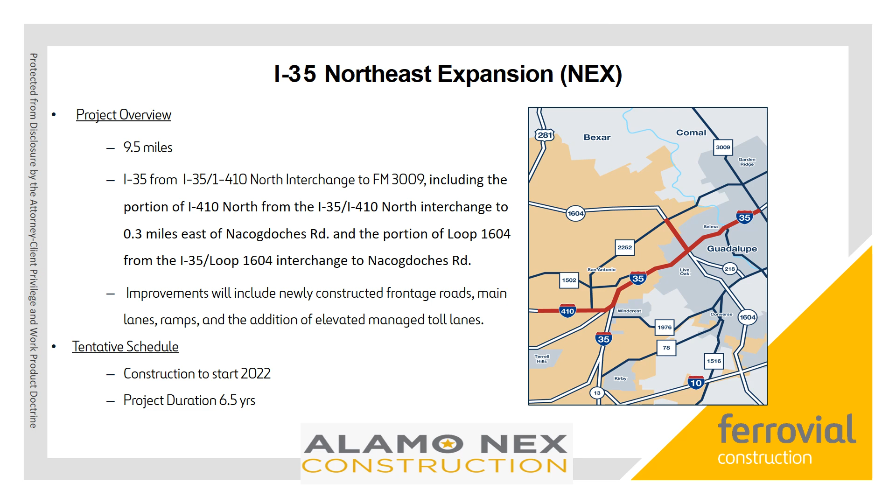Today we will answer the following questions: Who is responsible for your personal safety? Who is responsible for notifying your supervisor when you do not have the tools or equipment needed to perform your job safely? Who is responsible for reporting unsafe acts or conditions to your supervisor?

You have to ask yourself, who is responsible for your personal safety? You are.

Emergency lockdown procedure is as follows: Stop, sit, no activity, and make your badge visible.

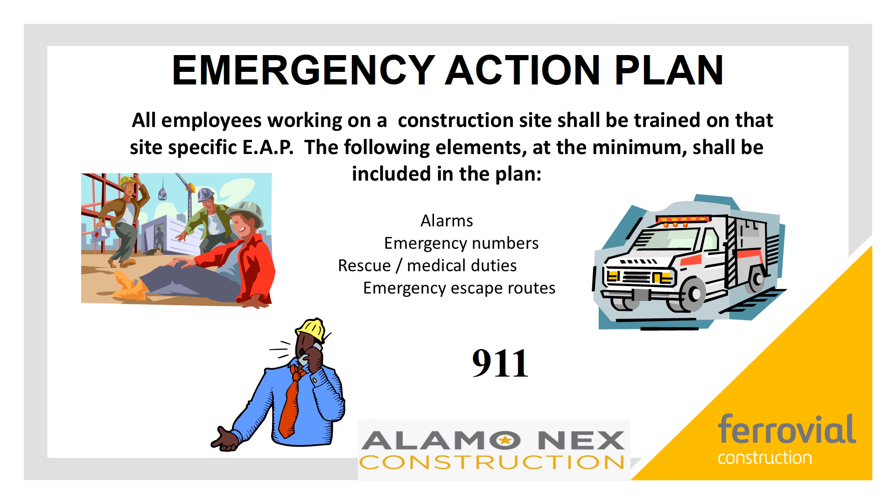Accident, injuries, and property damage reporting. All accidents, injuries, and property damages must be reported immediately to your supervisor as well as to the safety department. Follow your company's policy for the situation.

ID badge. All employees and contractors will be issued an ID badge and must have it with each person at all times while on site. Employees without a badge will be removed from the project. Please take note of the contact information on the back of the badge.

All employees are required to wear the appropriate PPE, from vests to hard hats, proper footwear, and safety glasses.

Traffic is the greatest hazard that we are all exposed to every day. Do not assume that motorists are looking out for you. Only work and park vehicles inside the lane closure. Do not alter the lane closure for any reason. Put your vehicles between you and oncoming traffic. Report damaged or missing devices to your supervisor.

Alamo NEX Construction has a zero-tolerance policy regarding fall protection. There will be 100% fall protection beginning at 6 feet above the working surface and maintained 6 feet back from any leading edge.

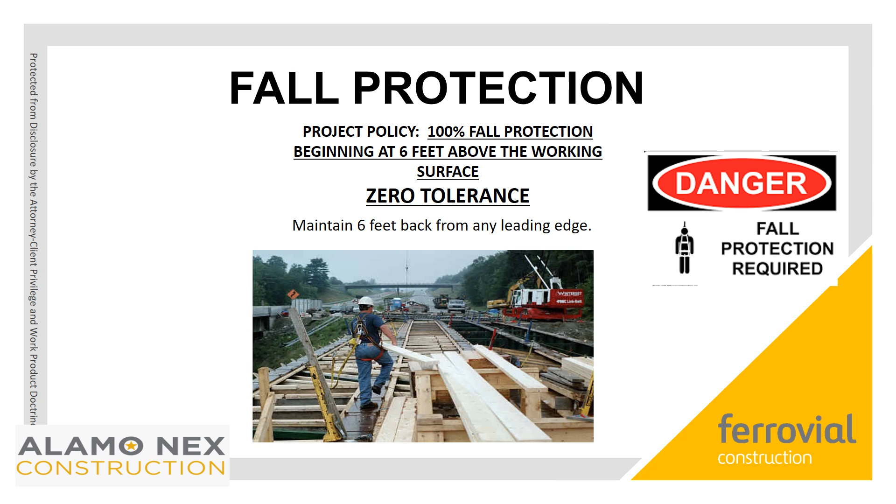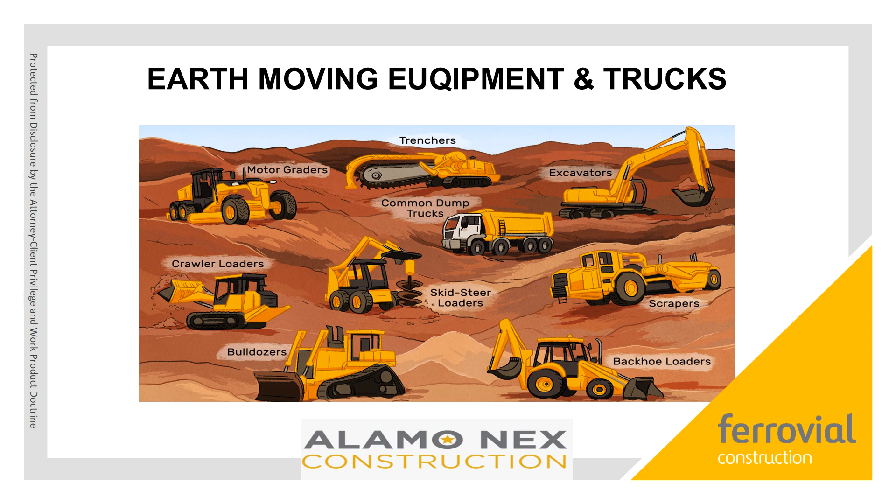Overhead power lines. Always be looking out for overhead power lines. If power lines are not visible, stop and confirm before you proceed on raising your truck bed. Contact Alamo NEX Construction Safety Department immediately if you have made contact with the overhead power line. Do not touch the damaged utility for any reason.

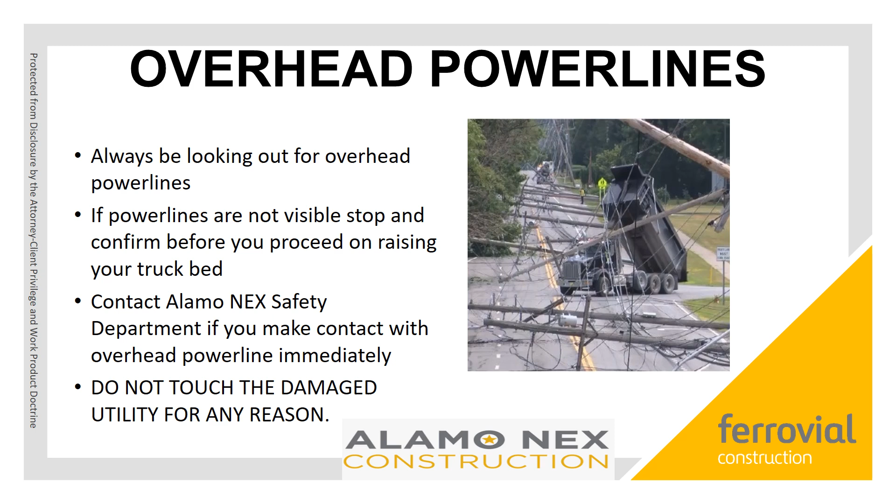Truck drivers are expected to maintain and inspect the truck and trailers daily. Avoid distractions, stay alert and focused on the job site. Dress appropriately for a job site. You'll have to have the correct PPE on if you step outside of the truck for any amount of time.

All truck drivers are expected to remain in their truck. Maintain and inspect the truck and trailers daily: tire pressure, pins, bushings, hoist cylinders, etc. Avoid driver distractions such as phones, radios, etc. Stay alert and focused while on the job site.

Dress appropriately for a job site. Shirts with sleeves, pants, work boots, high visibility vests, hard hat, and safety glasses are required if you're going to step out of the truck at any amount of time. Maintain 3 points of contact when entering or exiting the truck. Always know where workers are located in the loading, hauling, and dumping areas.

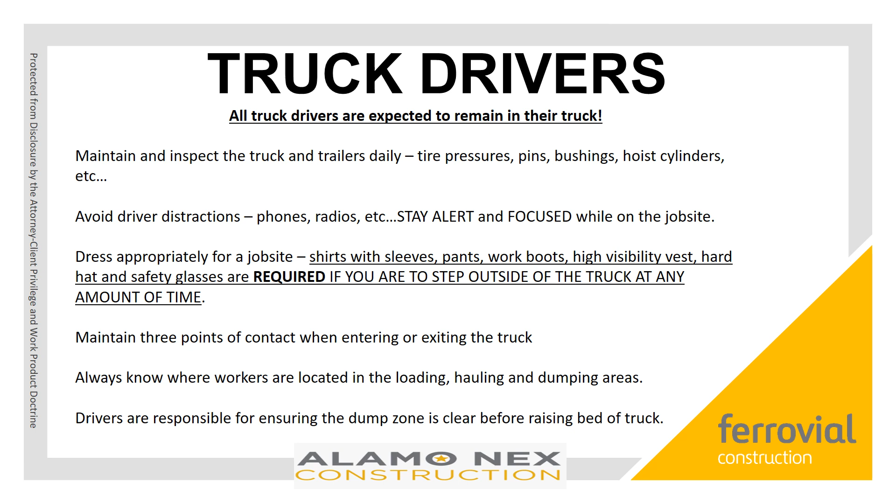Drivers are responsible for ensuring the dump zone is clear before raising the bed of the truck. Be aware of obstacles, other equipment, other workers, uneven sloping surfaces, poorly compacted fill, and wind conditions. You may help prevent potential issues by ensuring the area is reasonably level and compacted before spreading material, and by deflating the airbags before raising the dump box.

Always make sure your backup alarm is in good operating condition. Set the trailer brakes and release the truck brakes during end dumping to avoid unexpected load shifting and tip over. Never raise a load too close to people, the roadway, other equipment, or trucks.

When entering a job site, remember that there are others entering behind you. Obey all posted signs, and only enter and exit through the proper entrances and exits for that work area. If unsure of entrances and exits, contact your supervisor for this information.

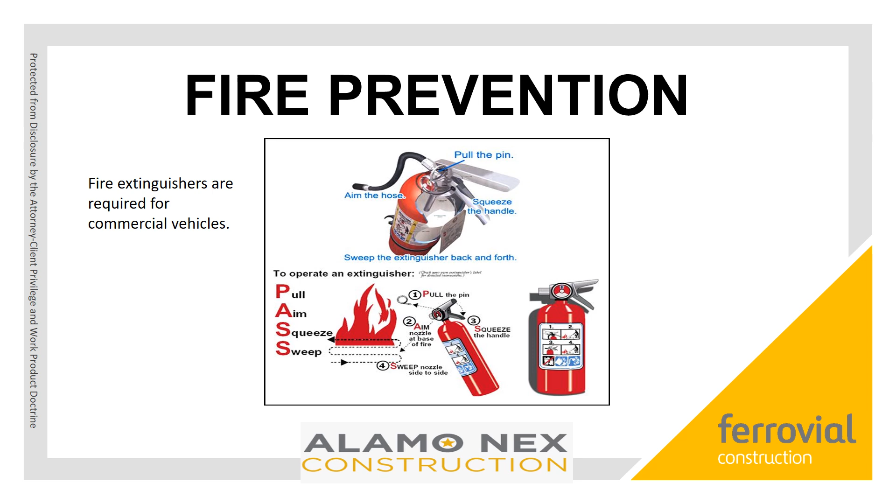When using a fire extinguisher, use the PASS method: pull, aim, squeeze, and sweep. Pull the pin, aim the hose, squeeze the handle, and sweep the extinguisher back and forth.

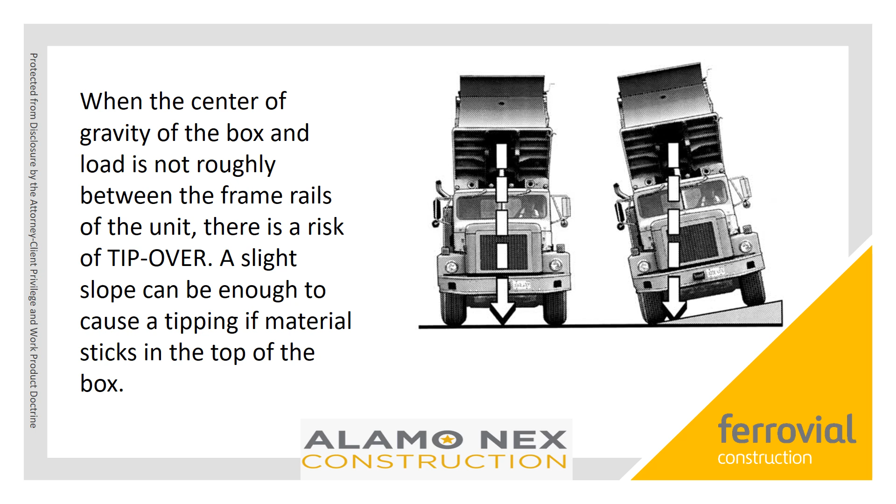When the center of gravity of the box load is not roughly between the frame rails of the unit, there's a risk of a tip over. A slight slope can be enough to cause tipping if material sticks in the top of the box. Please see the following examples of problems caused by unleveled ground.

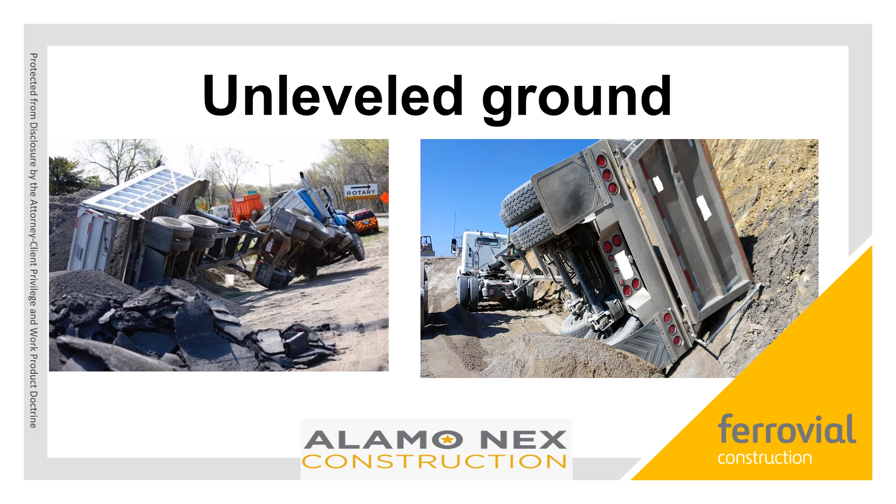This is one of the many reasons you need to be aware of your surroundings at all times. It is important that you only dump materials on level ground to help avoid issues like this one shown in the picture.

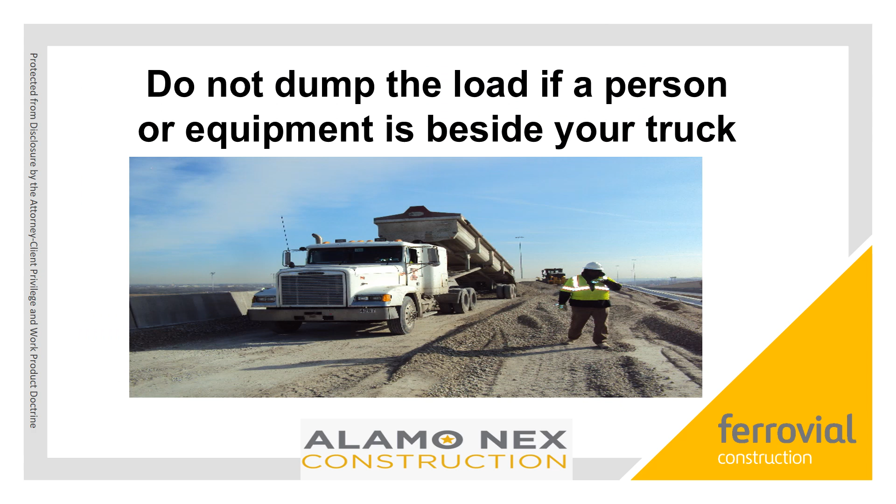Do not dump the load if a person or equipment is beside your truck. Make sure to check both sides as well as behind you prior to raising your bed. Don't let this happen to you.

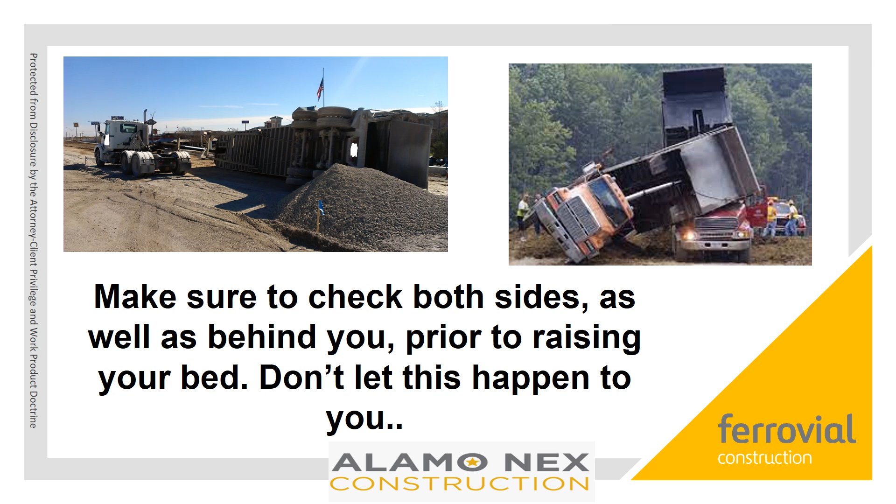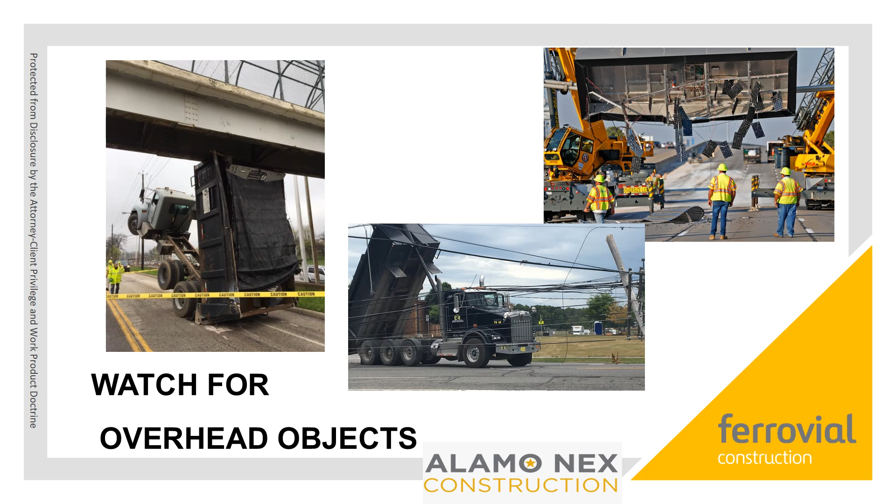It is important that you watch for overhead objects and ensure that your bed is down prior to leaving the job site. Be aware of debris and objects or openings on the ground.

Environmental controls are very important on this job. Please do not drive over stormwater controls.

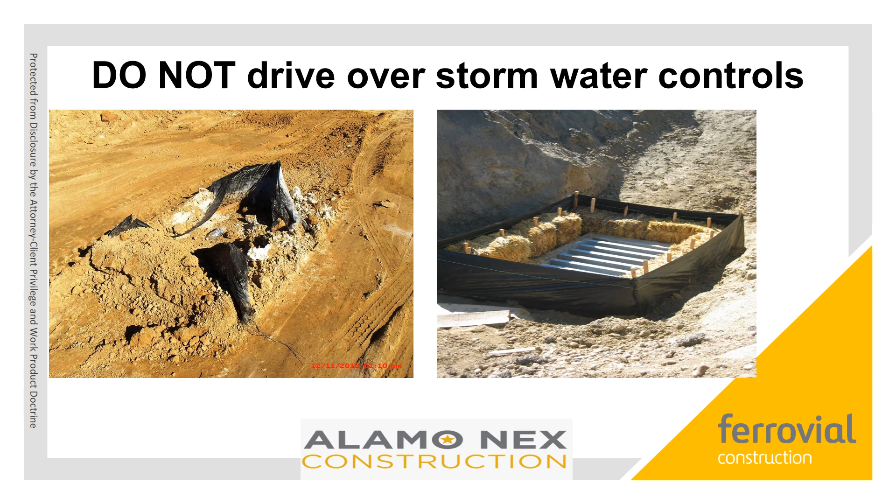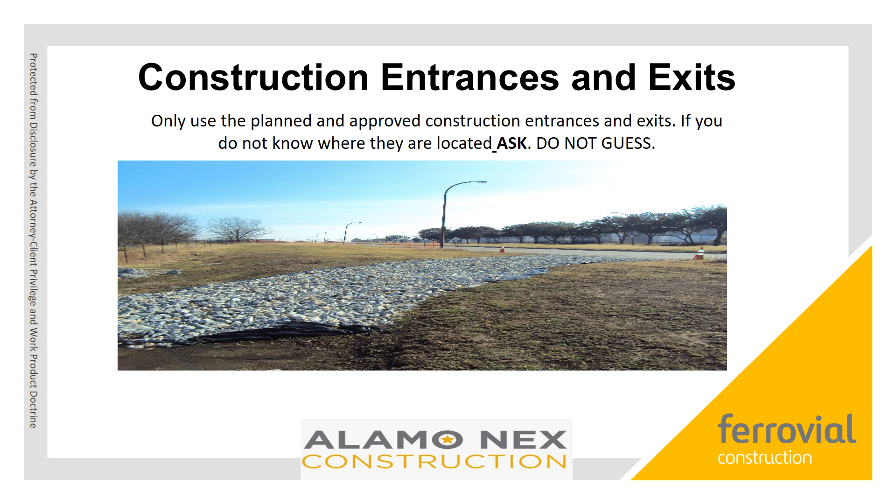Construction entrances and exits: only use the planned and approved construction entrances and exits. If you do not know where they are located, ask. Do not guess. In order to avoid track out onto the roadway, please use the rock exits.

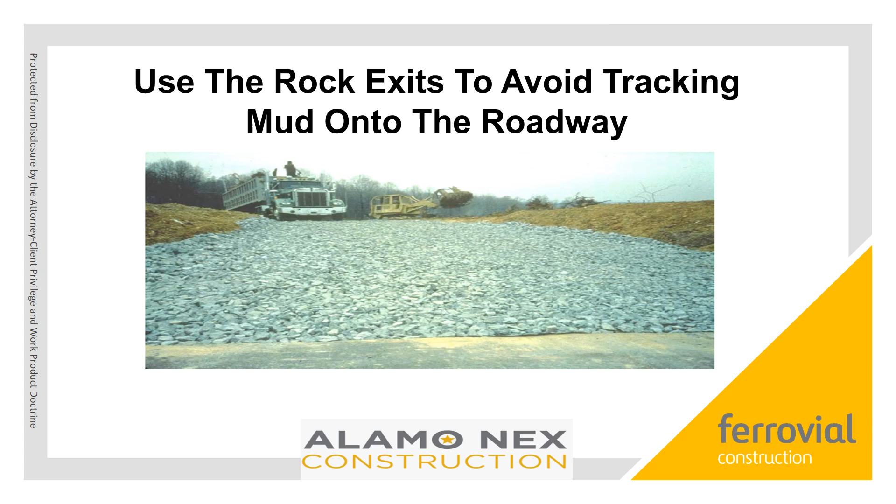Spills: each truck entering the job site shall be equipped with a spill kit. In the event of a spill, immediately contain the spill and notify the Alamo NEX Environmental Department.

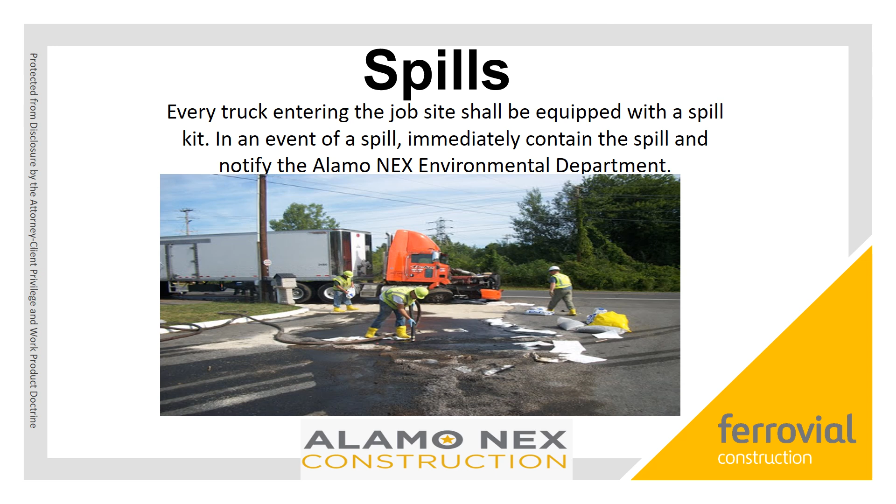Never dump side by side. This way, you avoid potential tip overs and damage to other equipment.

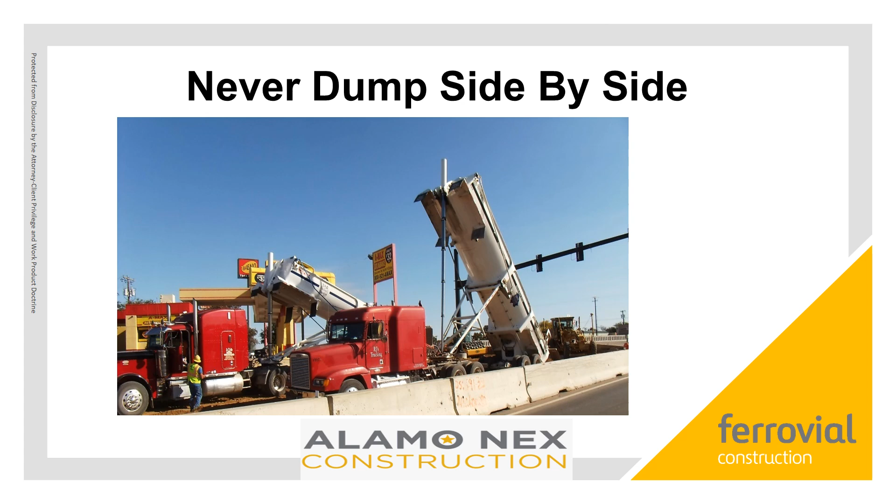Do not move or tamper with traffic control devices. Traffic control devices are in place for a reason. For the safety of you and the traveling public, do not move or tamper with the traffic control devices. If you feel something needs to be changed, please contact your supervisor.

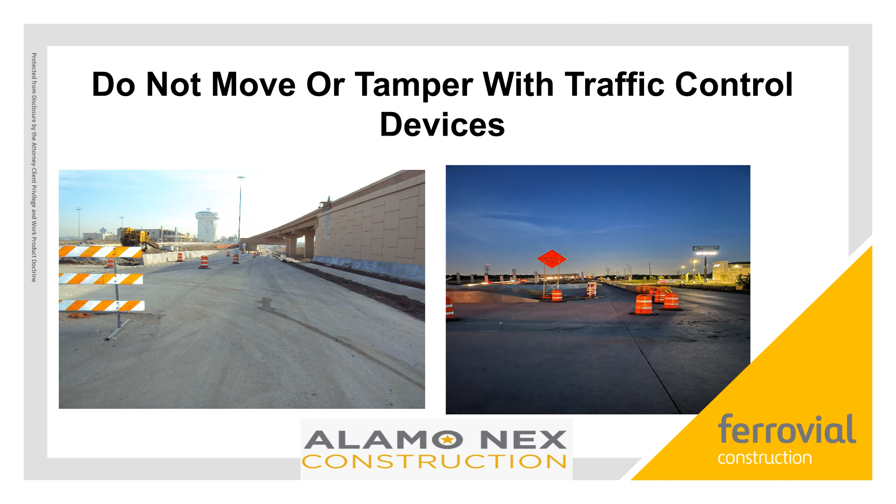Improving and reinforcing safety practices and awareness takes a continuous effort in which we all have to do our part. Our goal: zero accidents, zero injuries, zero excuses.